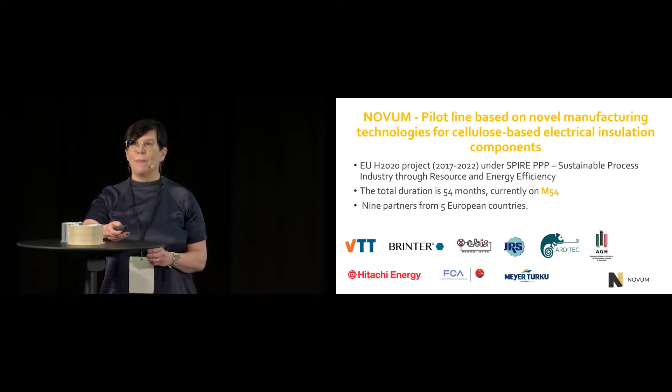Then we have JRS from Germany, and JRS is our material supplier, so they have been supplying us with the microcellulose that we used in our cellulose composites. Arditec from France is the partner who is providing us the life cycle assessment, life cycle calculation, very important things in this context.

AGH, it's a university from Poland, and they have been involved in testing of the electrical insulation components. And then we have the end-use partners. So we have Hitachi Energy involved in electrical insulation components, CRF, which is the Central Research Fiat, so that's the automotive partner. And then we have Meyer Turku, which is also local from here, Turku obviously, and they are involved in shipbuilding. So these are the end-use partners.

And where did it all start? So it started with an idea from ABB, which is currently Hitachi Energy. They had an idea that they wanted their electrical insulation component manufacturing to be more streamlined, more energy efficient, more automated, and so forth. And they had this brilliant idea that why not use 3D printing to do that? So they contacted VTT because we had some background in development of cellulose-based materials for additive manufacturing or 3D printing. And together we started to put together this project and contact the partners that we considered relevant for this purpose.

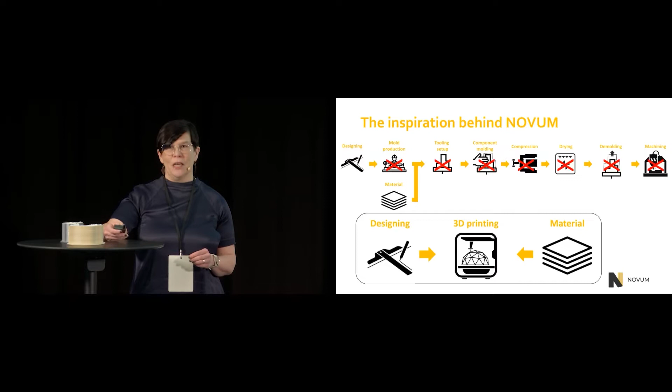And the inspiration was that this ABB's 11-step manufacturing method could be streamlined into just maybe 3 steps. But then after it's been 4.5 years, so things have changed. And now, as I said, Novum is so much more than just electrical insulation components. So we are today focusing on 3D printing of cellulose-based materials. There is cellulose-based composite, and then we are also looking into 3D printing of fiber foams.

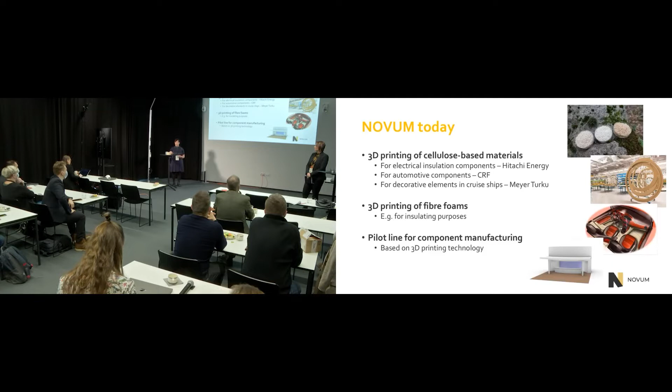And then we have the 3 different end-use cases. So we still have the electrical insulation components represented by Hitachi Energy, but we also look into automotive components represented by Central Research Fiat, and then we also look into decorative elements in cruise ships, which is represented by Meyer Turku. And as I said, 3D printing of fiber foams is also there, for example, for insulation purposes.

And then the real focus and the outcome needs to be this pilot line, so that it has been designed and built up, and that's based on 3D printing technology. So this is the focus of Novum today. And you will hear about these different components of the Novum project in the following presentation from the project partners.

We'll move on to the next presentation. I ask Tomi Kalpio from Brinter to come to the stage, and he will tell about the pilot line totally, and also showing you this is the grand premiere for the Novum pilot line video. So Tomi will show you also that one. So welcome, Tomi.

Thank you. Can you hear me loud and clear? Welcome all of you from my behalf as well. It's finally nice to meet you face to face after a while. Last time I was in this big audience in Formnext last November, so it's nice to be here again.

Today I'm telling you quite shortly, around 10 minutes, a little bit about the history of this pilot line, how the development has gone, and some ideas about the future. So hoping that we can get some discussions ongoing about the future of hybrid manufacturing, to be more specific. So, like said, I would like to have some good discussions after this presentation next to the pilot line or in the lunch. We don't have much time for questions right after my presentation, but later on we will have a lot. Some showcasing of these future modular environments.

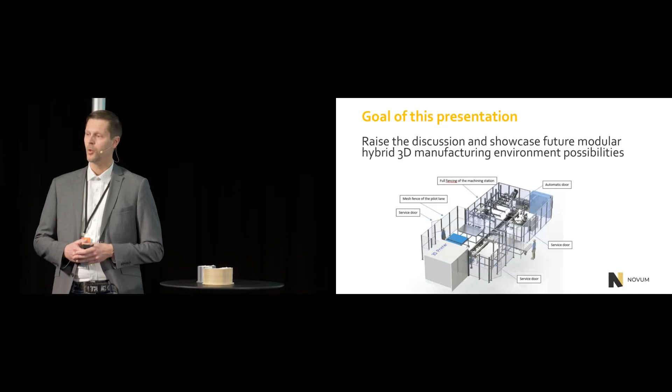So not only the printer itself is modular, but the environment where it will be used in production lines can be also modular. I see that this is more the future than these lines that are meant for only one purpose at a time. This is divided into two parts. So first regarding the printer itself and the modularity. How it all began. Heli already told you a little bit about how these projects have been evolving during these 4.5 years. So at some point we have had some changes in the focus areas. So that's why the focus of this development part has also changed a little bit.

So in the left side you can see where we started with a small desktop unit. We started printing some base types of cellulose materials to make some pre-analyses. And in the next phase, we developed this small-scale granulate printing system, which was already usable in the production lines as well. Like you can see in the middle top picture, there's a conveyor on the bottom side of this desktop unit.

You can move here. I was asked you to stand here so you can see me. Online people can see you as well. Okay. Sorry.

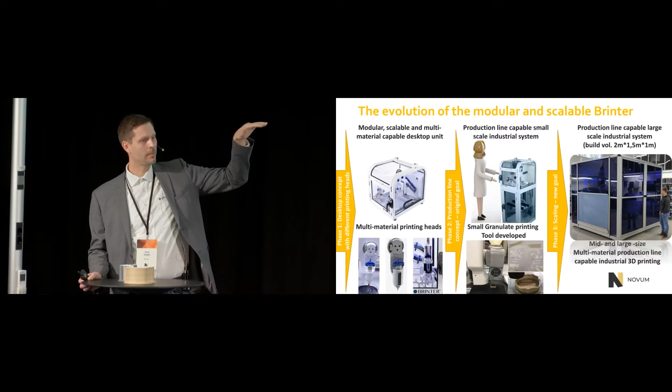But like I said, there's a conveyor unit on the bottom side of this desktop unit. So you can move the pallet in, lift it up, print on top of that, and take it out automatically. But this was still on the small scale system.

But in this phase, we got a small change to the project. Like you can see, the plan was to scale the concept a little bit bigger. Like you can see on the right side, the end product that you will see soon in a couple of hours in the pilot line, it's a little bit bigger than in the middle scene.

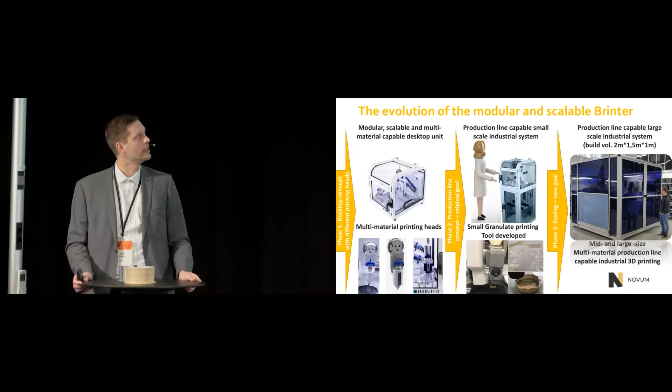So in this middle picture, it was like 300 millimeters times 200 millimeters times maximum 500 millimeters if you use this lift system on the bottom of this desktop unit. So now it's 2 meters times 1.5 meters times 1 meter. That is the maximum build size of the machine. So it was quite a challenge for us. We decided to take it, and now we are quite happy about it.

So we have a very nice platform that can be used in R&D, and why not in some production systems as well, or production parts. And also it's very scalable to the different challenges in the future from the modularity point of view. So both of the machines are very, very modular from that point of view, that you can use whatever tools or printing heads with the machine you want.

Few keywords. We can use our own developed printing heads, tools, component placement units, quality control systems, and so on, but also integrate third-party printing heads or tools in the same machine in the future based on the end product needs. So it brings us some possibilities to find new kinds of use cases, including multi-material. And this is one good example that I will come to a little bit later on.

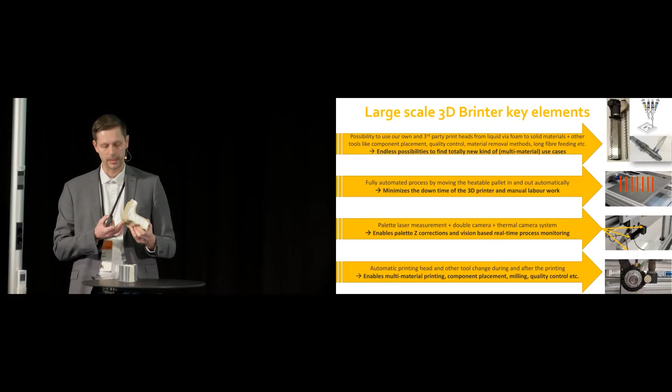So combining, for example, this cellulose-based material as a solid part and then filling it up with the foam, for example. These are very interesting cases for the future as well, using different kinds of materials in both cases.

The process is fully automated. Most of the 3D printing systems are something like that: you open the door and take the parts out, and then you put the new printing plate in and again start the printing. But in this system, it's fully automated. So again, the pallet comes in automatically. When the print job is done, it takes it out automatically. So it minimizes the downtime of the printer and manual labor work as well.

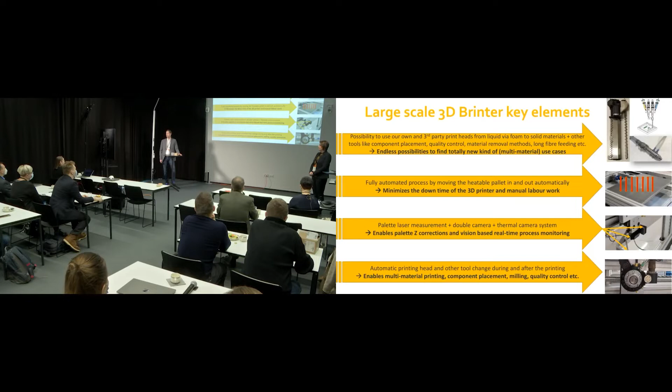Different kinds of analysis, laser measurement systems calibrating the printing bed, a couple of cameras to follow up the process, and also a thermal camera, which was quite recently integrated to the system, which helps our future development both on the process side but also the material development side, so we can see that the flows and everything are correct and the temperatures are where we need.

And again, on the bottom side, you can see this automatic interface that enables us to use whatever printing heads or tools with the, so to speak, printer. Couple of keywords. The printer's name comes from biomaterials and bioinks plus 3D printing. If you didn't know that, now you know.

Sustainable manufacturing. In this case, in the NOVUM project, it means that we have been using biomaterials and recycled the same material locally multiple times and made some tests as well, and it seems to work quite well. And of course, the possibility to use industrial grade standard materials with the same machine, also recycled versions. And multi-material is one of the key aspects, like shown here.

So we can have up to 4 different materials or even some component placement systems, so we can also implement some sensors inside of the printed parts, which could be quite interesting as well. Like mentioned on the bottom side, you can see these few development ideas, where component placement and this multi-material thing is one of the key aspects and main focuses, at least for us, including the foam.

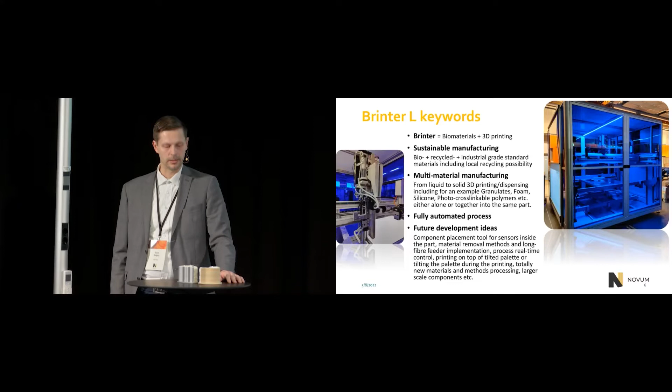And the second part is related to the pilot line and modular hybrid manufacturing environment.

There's a lot of text. I'm not going through all of these. You will get the slides later on. I just wrote down all the main aspects or topics that are interesting, at least from our point of view. But the main thing is that the whole production line should be modular and not only the

3D printer itself. We can then have multiple 3D printers feeding the same post-processing line, which could be very important with bigger parts when the printer itself is the bottleneck of the production. So if it takes multiple hours to print some parts, the other part of the production line just waits for the parts. So then we can have multiple printers to print the parts to speed that part up.

But also hybrid manufacturing environments, so that we could have injection molding machines and 3D printers in the same production lines, so that both manufacturing machines feed the same post-processing line, even in the different phases of the product life cycle. For example, in the ramp-up or prototype phase, we could print the parts and mass produce them with injection molding machines, and later on, after the mass production phase is gone and we have, so to

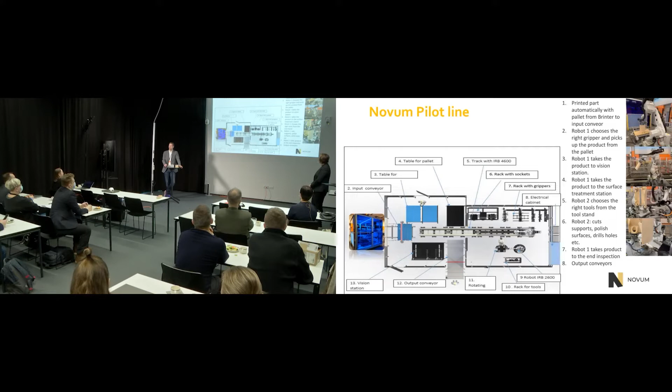But it starts from the left with the printer, where the part is printed, then it moves with the pallet to the input conveyor, and then the robot takes it from the pallet and takes it to the vision station and post-processing line for further processing. And there could be multiple different kinds of processes like drilling the holes or polishing or all kinds of different methods based on the needs.

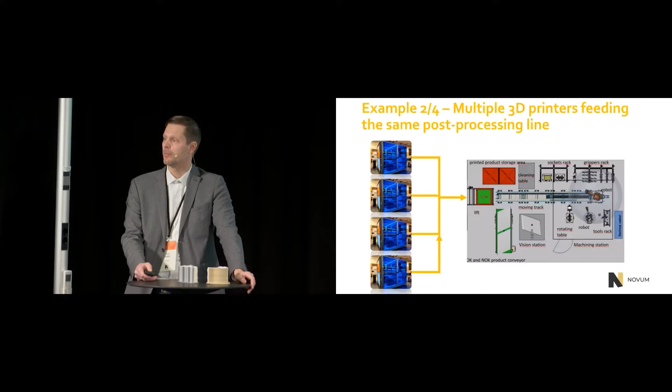Here I added 4 different case examples that I talked about earlier about this modular system. So the same post-processing line could handle, for example, parts from a printer and an injection molding machine. There could also be multiple different 3D printers feeding the same post-processing line.

Or this case that I mentioned, that injection molded parts will be moved to the printer and, for example, some sensors placed on top of that and some other material printed on top of that or something like that. So just to raise some ideas that you can take home and think through later on if you get some good end application ideas.

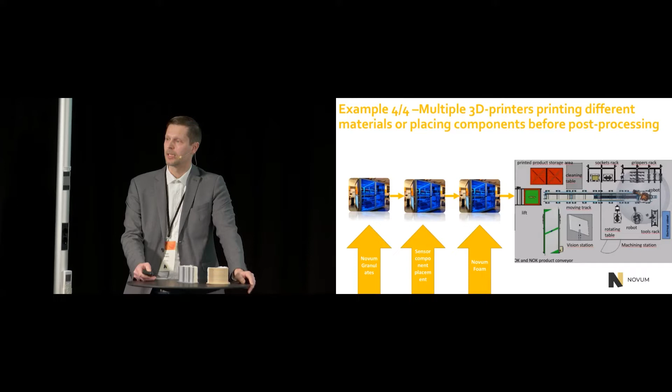And this is a little bit similar case that I mentioned. So first print granulates, for example, in the first machine. Then the next one places components and the third one prints foam. And all of these can be made with the same machine or machines which are next to each other as well to speed up the process if needed.

I don't say thank you yet. I ask if you could put the video on. Thank you.

In the fast-moving world of today, how can we replace the inefficient, labor-intensive and rigid processes of yesterday with new and better ones? We have the answer. The NOVUM project has created a one-of-a-kind pilot line that combines the benefits of versatile cellulose-based materials, flexible 3D printing and a fully automated post-processing line. This first-in-the-world pilot line enables rapid, design-driven production of intricate components for various end uses, such as components for electrical insulation or for the automotive and shipbuilding industries.

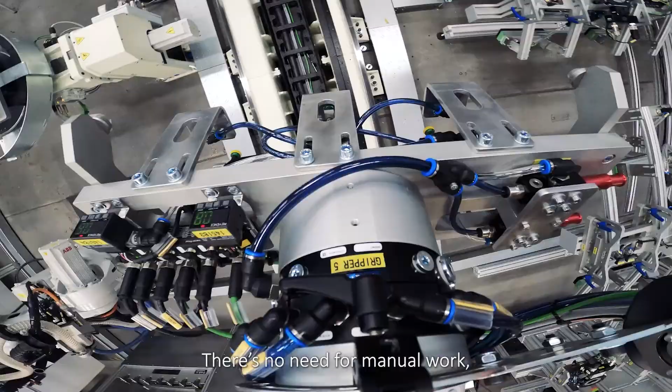The pilot line blends the various, at times complex, manufacturing processes into one seamless stage, and the resulting time and cost savings are significant. The fully automated pilot line is modular, flexible, and easy to scale up. There's no need for manual work, so the risk for human errors is reduced. Our cellulose-based components begin their journey through the 12-meter-long production line from the 3D printer.

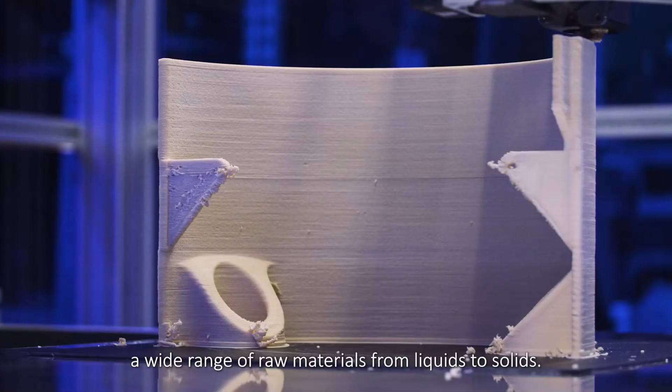The revolutionary industrial printer, manufactured by Brinter, is custom-designed and fully automated. Uniquely, the printer supports the future use of a wide range of raw materials, from liquids to solids. The process of exchanging the print head or other tools is fully automated. Materials, print quality, or even the composition can be changed or mixed mid-print.

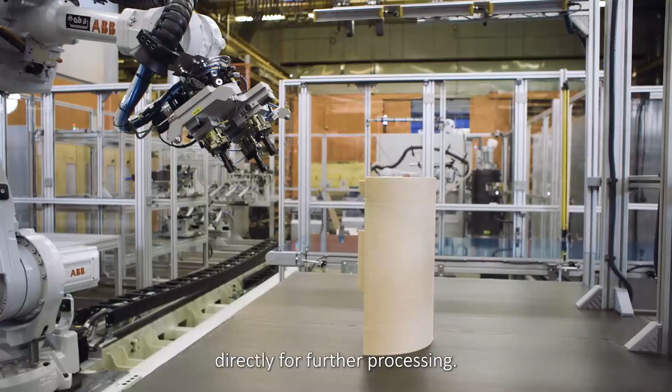When the printer's ready, a robot automatically fetches the component to the belt. On the belt, the component either passes through a vision station for quality control or moves directly for further processing. At the vision station, faulty components are removed from the belt. Flawless components are cleared to continue to the machining station.

The machining station is where the robots rule. They fetch and attach the needed parts to the modular production line independently. The tool-changing interface enables the attachment of basically any instrument. The robots are able to wield tools such as saws, drills or milling heads, or quality control instruments such as cameras or measuring devices. At the machining station, the components get their final form.

The station is protected by plexiglass so the robots can get on with their work undisturbed. This unique production line enables large-scale, flexible manufacturing. The integrated and fully automated post-production line saves time and money as the components can be finalized in the same process. Using the pilot line, we can manufacture anything from very small components to parts over 1.5 meters in length.

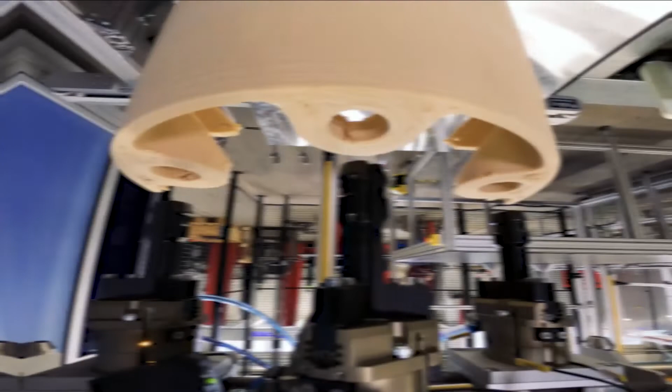The line is easy to scale up by adding more printers or post-production units to increase the production volume substantially. At the moment, we are manufacturing components for the transformer, automotive and shipbuilding industries. But thanks to the versatile nature of our raw materials and the flexibility of the 3D printing and post-production technologies, there are no limits to what we can do.

Wow, that was something. Thank you. Thanks. Yeah. I also saw, Tommy, the first time the latest version, so looks good.

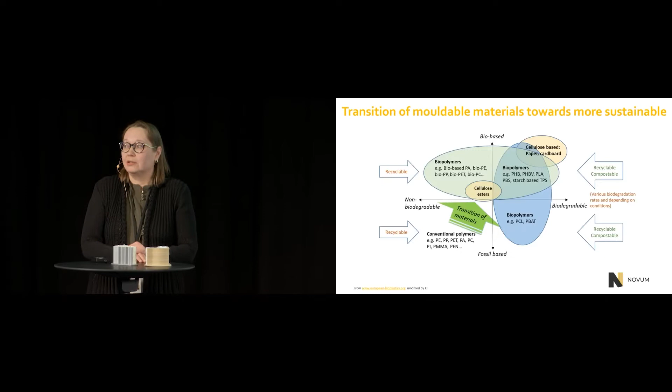First, I would like to show you a bigger picture of the soft materials. There is a kind of transition of these moldable materials from fossil-based materials to more bio-based materials. In the NOVUM scope, we work with cellulose esters and cellulose materials. Those are located, as you can see, in the world of materials.

And if we think of 3D printable materials for the future, there is a need for novel thermoplastic filaments and granulates useful for 3D printing, for example in home use. Then the material needs to be very safe, so no toxic fumes are allowed to be released during printing. Materials need to be bio-based and maybe contain some fibers to bring stiffness and possibly visual outlook for the product. And we need to consider also the product end of life.

So they need to be recyclable, maybe in some cases biodegradable, but anyway they need to have combustibility without fossil carbon dioxide. So maybe one perspective in the future will be all-cellulose composite materials.

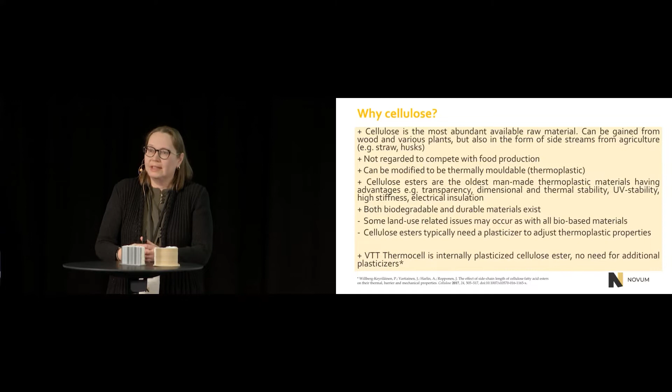Then why cellulose in this NOVUM project? Cellulose is the most abundant available raw material. It can be gained from wood, various plants, and also side streams from agriculture, for example. It is not regarded to compete with food production, and can be modified to be thermally moldable.

For example, cellulose esters are actually the oldest man-made thermoplastic materials, having advantages like transparency, dimensional and thermal stability, UV stability, high stiffness and electrical insulation. There are both biodegradable and very durable materials within these cellulose esters. There are some land use related issues, but those are connected with all bio-based materials.

Cellulose esters typically need a plasticizer to adjust the thermoplastic properties, which is a little bit of a drawback. But for that, VTT has developed a Thermocell material, which is an internally plasticized cellulose ester where the plasticizer is coupled to the cellulose backbone. So there is no need for additional plasticizer. You can read more about that in our publications.

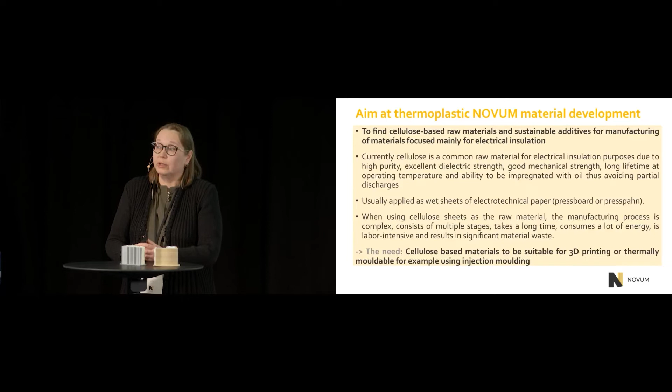And as Heli presented, there are several issues related to those processing methods: the manufacturing process is very complex, consisting of multiple stages, takes a long time, consumes a lot of energy, is very labor intensive and results in significant material waste. So there is a need for cellulose-based material suitable for 3D printing or thermal molding, for example using injection molding.

About the material development, this was already discussed a little bit, but within the NOVUM project, we made the material development in joint collaboration with material formulation, 3D printing, testing, and prototyping the final test product and testing them. So it was a collaborative, simultaneous loop of development.

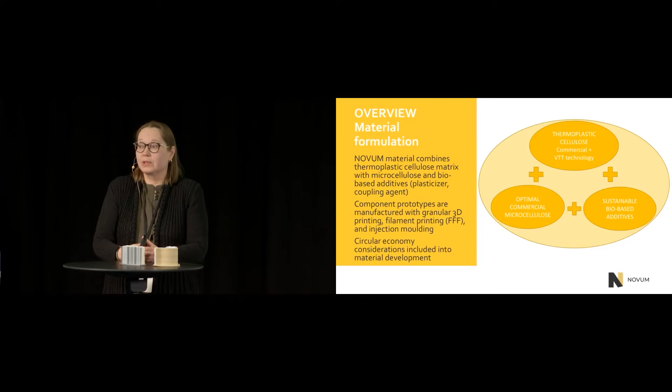Here is some overview of the material formulation. This new NOVUM material combines a thermoplastic cellulose matrix with microcellulose and bio-based additives like plasticizer and coupling agents. Prototypes are manufactured with granular printing, filament printing, and injection molding. And during the material formulation, circular economy considerations were also included.

Then recyclability of this material was also mentioned, which is a very, very important issue from the material tailoring point of view. We have studied the recyclability of these new materials and found out that it can actually withstand 5 recycling rounds without adding any virgin material.

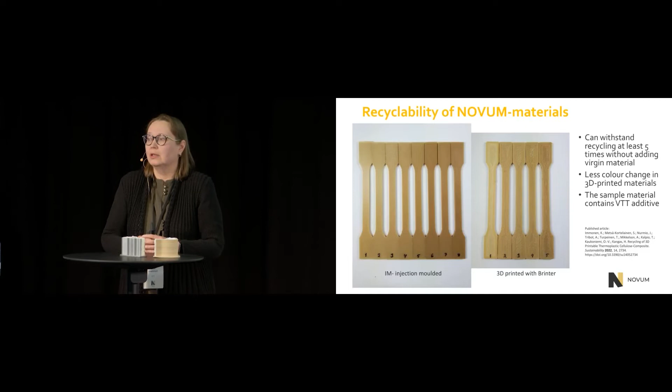You can see some injection molded samples and 3D printed samples here within the different recycling rounds. There is a little bit of color change, mainly coming from the microcellulose, but not too much perhaps. The color is quite light beige, but it is still usable after 5 recycling rounds. You can read more in our recently published article.

As a conclusion, we have developed within this NOVUM project a novel high cellulose content thermoplastic material and demonstrated it successfully in granular 3D printing, filament 3D printing, and injection molding. It has higher strength and thermal resistance than comparable commercial materials. The NOVUM compound is recyclable at least 5 times without adding virgin material. And when using this novel granular printing method, no additional filament manufacturing is needed between recycling rounds.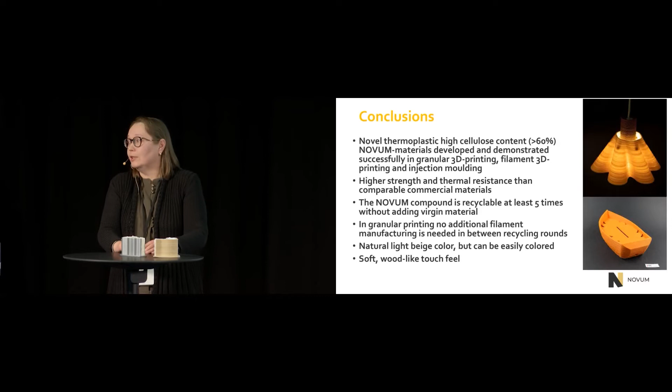It has a natural light beige color, but can be easily colored, as you can see here in this orange boat below. It has a soft wood-like touch, and in the upper picture you can see a lampshade where the light is nicely coming through the printed lines.

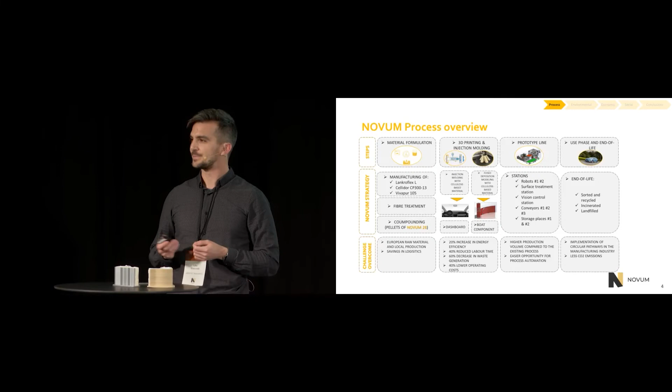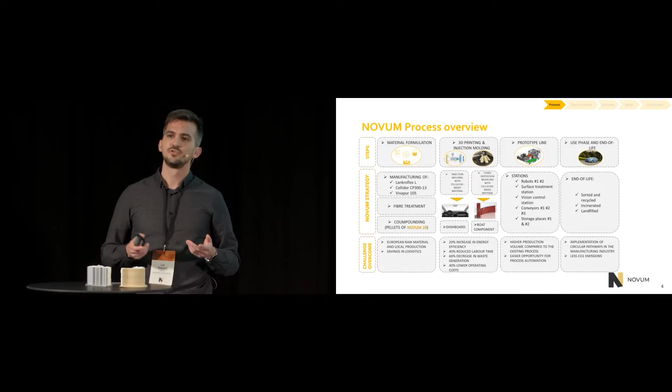Today I will present some of the results we got from the sustainable assessments. So first of all, this is the process we wanted to assess from an environmental, economic, and social point of view. So basically, we divided it in 4 main steps. First of all, we have the material formulation. Then we have the 3D printing and injection molding. Then the prototype line, and finally the use phase and the end of life.

So let's start with the environmental assessment. In this slide, as you can see, we try to first establish a comparison for the production of 1 kilogram of different materials, including NOVUM 28, of course, that you can see in yellow on the left. And for the comparison, we chose different materials, common materials widely used in the industry. So we have polypropylene, polyethylene, and acrylonitrile butadiene styrene, let's say ABS.

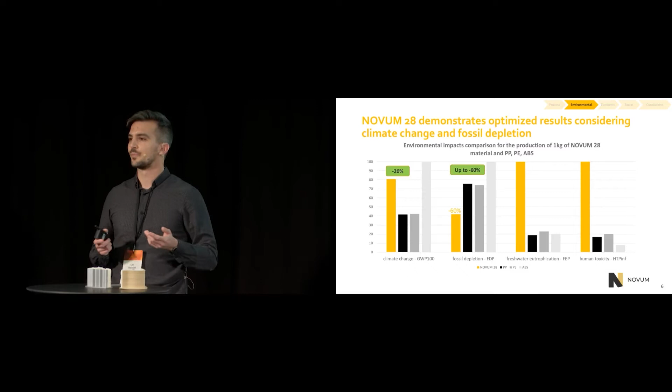And what we can say about this slide is that we observe optimized results considering fossil depletion and climate change. If we take, for example, the fossil depletion, we observe an impact reduction up to 60% between our material, NOVUM 28, and the ABS. So these are quite encouraging results.

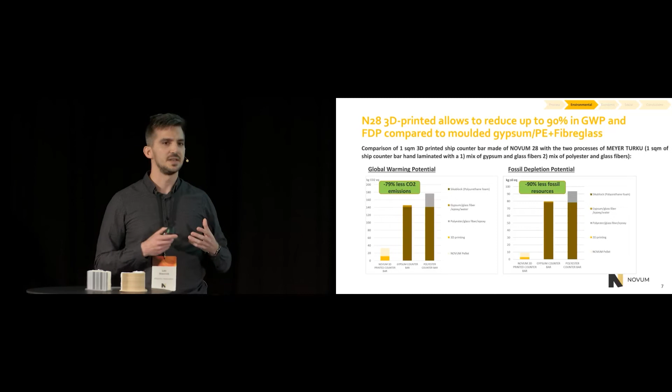Then we also compared the environmental impact for 3 processes to produce 1 square meter of the same end product, which was a ship counterbar, normally developed by Meyer Turku. So we have 3 processes on these 2 figures. So the first one on the left is our process, the NOVUM 28 material formulation plus the 3D printing of Brinter. And then the second and third processes are developed by Meyer Turku using hand lamination with 2 different mixes of material.

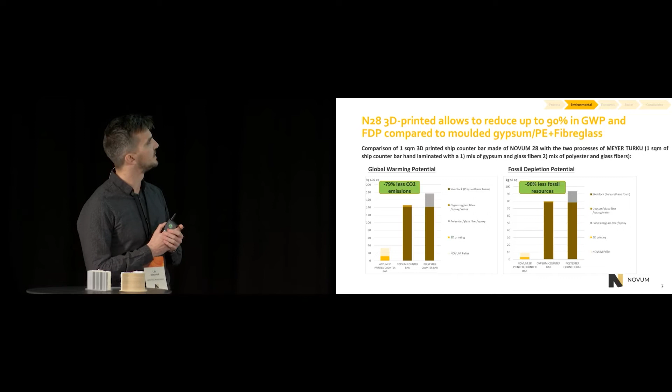So the first one in the middle is a mix of gypsum and glass fiber, and the second one is a mix of polyester and glass fiber. So they're both using hand lamination. And we can see that the figures speak for themselves. We have really good results concerning our process using 3D printing and cellulose-based material. We have a reduction of 79% in the CO2 emission and a reduction of 90% in fossil resources.

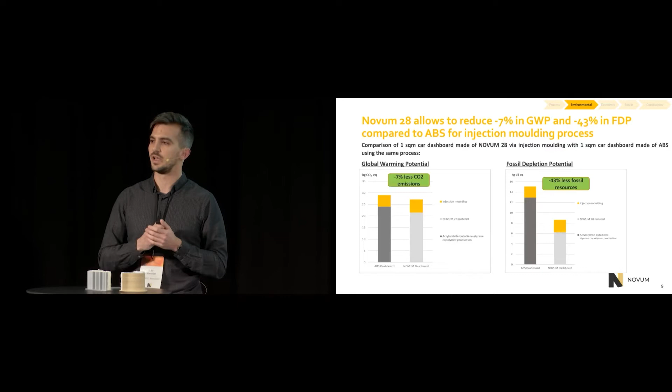And then we did exactly the same thing, but this time comparing a second end product, which is 1 square meter of a car dashboard. And this time we use injection molding for both processes, but using different materials. So we have the ABS material on the left and our material, Novum 28, on the right.

And these are quite good results as well. This is not as impressive as the previous scenario, but we can still observe a reduction of 7% in CO2 emission and a reduction of almost half of fossil resources for the same product and different materials.

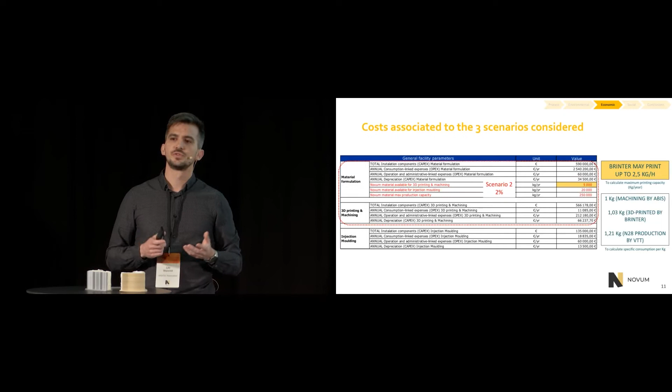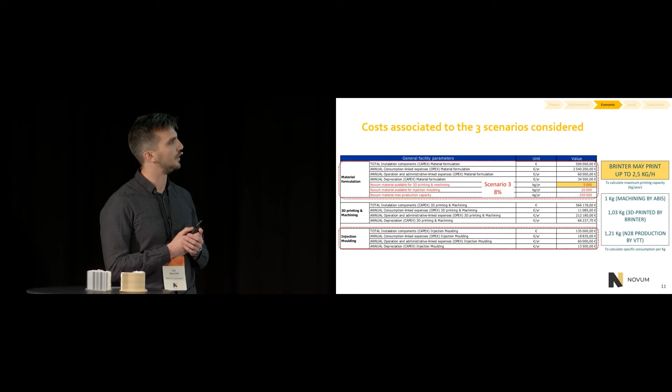We took 2% because VTT is able to produce 250 tons a year of Novum 28, when Brinter can print 5,000 kilograms a year. So it didn't make sense to allocate the whole production of VTT to Brinter. And in the third scenario, we applied the same logic with 8% of VTT's production capacity, considering the material formulation and another process, which is injection molding. So these are the 3 scenarios.

And then this is just a parenthesis concerning the CapEx and OpEx distribution of the second scenario, which is the material formulation and the 3D printing. So we can see that the OpEx accounts for 63%, the CapEx 23%, and the consumption OpEx 14%.

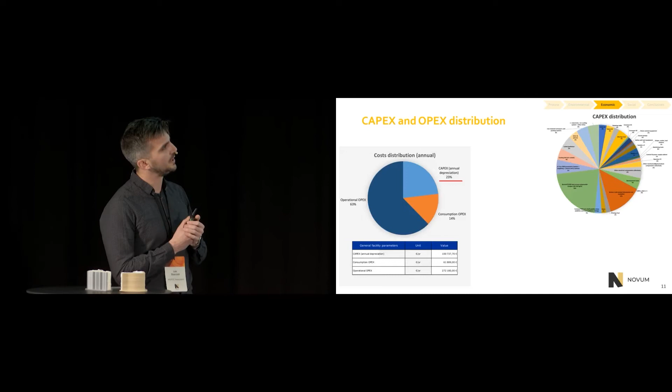Then if we go deeper in the CapEx distribution, we can see that the machinery of Brinter and ABIS are the main contributors, let's say. And for the OpEx, we can see that more than 3/4 are coming from the labor force of ABIS, Brinter, and VTT.

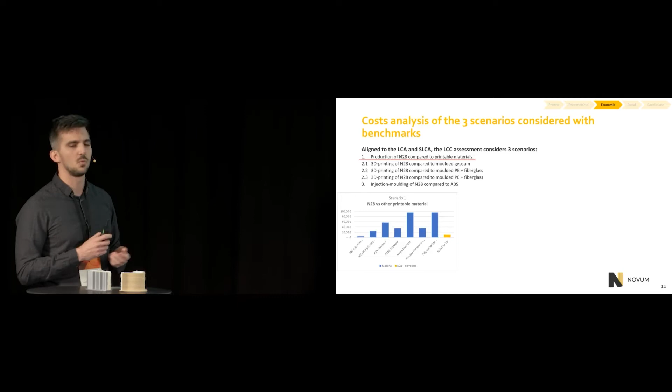So this was just a parenthesis. Now I go back to the different scenarios and their results. So for scenario number 1, considering only the printable material, we try to compare our material with the current printable materials on the market. And we can see that we have some really good results, with one of the cheapest printable materials on the market, around 10 euros. Then if we compare it with nylon filament, for example, it almost reaches 100 euros. So this is quite good.

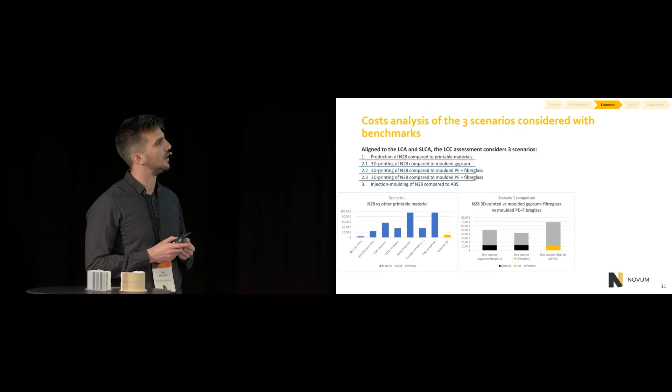Then for scenario number 2, we have the Novum 28 3D printed versus the molded gypsum fiberglass and molded polyethylene and fiberglass. So these are the 2 scenarios that I described previously, developed by Meyer Turku. So we can see that our process is quite good, reaching 70 euros for the ship counter.

Sorry, can I have a glass of water? I have a pretty dry throat. Thanks. Sorry about that.

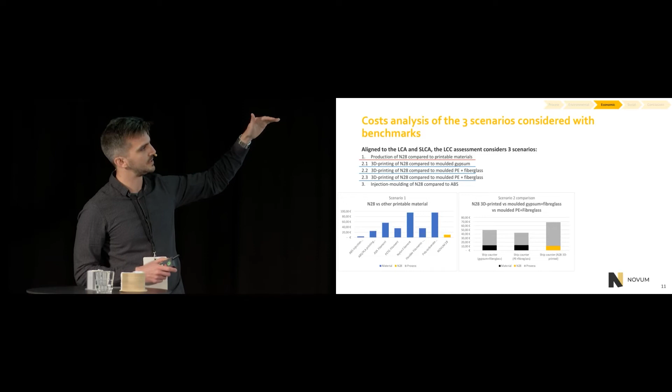So we can see that if we consider only the material, we are quite stable. We have almost the same price for the 3 materials. So considering the polyethylene and the fiberglass, the gypsum and the fiberglass, and our material, it's quite the same. But then if we consider the process itself, the 3D printing, it's a bit higher for us, which is normal because it's a prototype, so it needs to be further optimized.

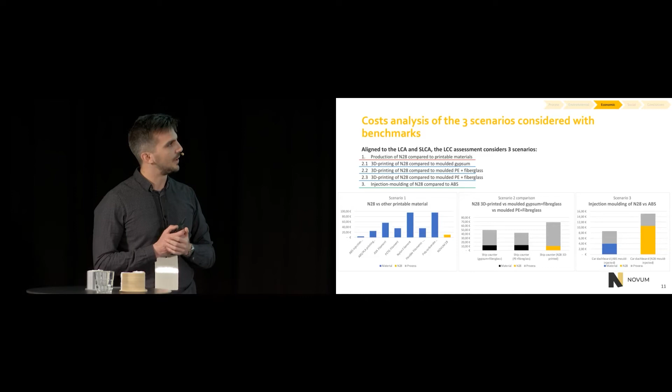And then we did the same for the injection molding of Novum 28 versus the ABS. So this time we have the ABS, which is quite cheaper. It's normal because it's a widely used material in the industry. And so our material is a bit more expensive, but the process is the same, which is injection molding.

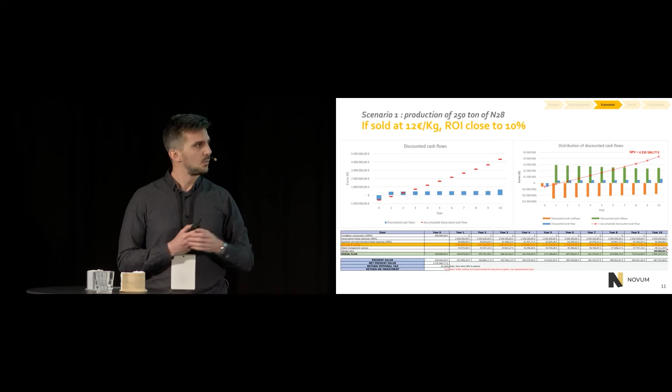So then we have a first scenario with a huge volume production of 250 tons of Novum 28. We try to forecast, we try to make a business model. So we have a material costing 10 euros, and if we sell it at 12 euros, we can reach a return on investment close to 10%, which is quite interesting.

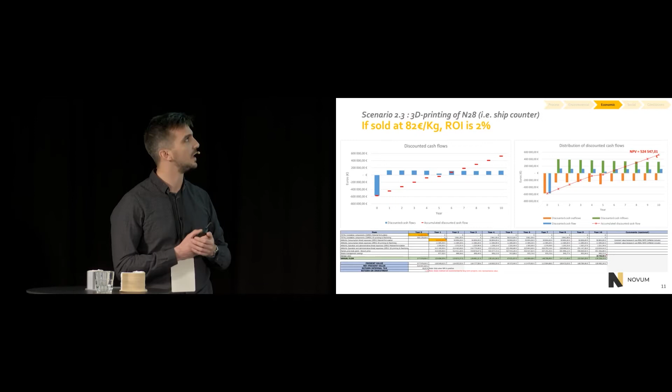Then for this second scenario, including 3D printing as the process, of course the price is higher. It costs us around 65 euros, and if we sell it at 82 euros a kilogram, we have a return on investment of 2%. I'm going quick, sorry, Alina.

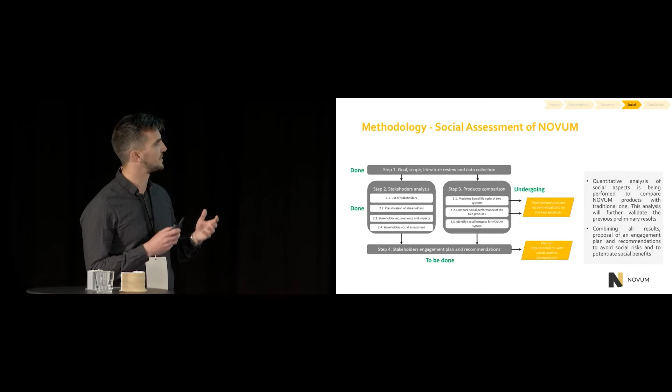So then we move to the social assessment quickly. This is the methodology we applied. We have step 1, the goal, scope, and definition. Then we proceed to stakeholder analysis, where we perform different interviews with the different partners, etc. And then we have a product comparison, and with all these steps together, we can produce a stakeholder engagement plan and provide some recommendations.

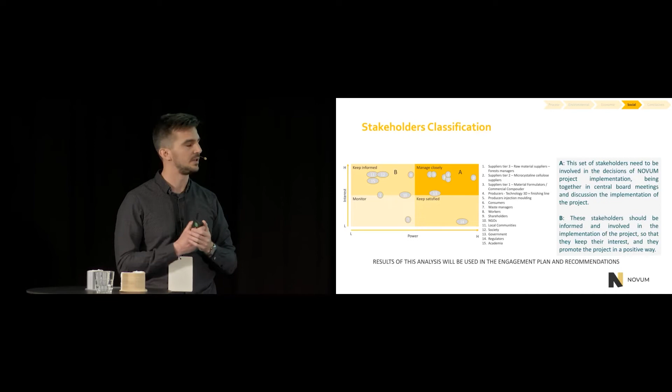Quickly, this is a tool we used in the stakeholder analysis. It is a power interest grid. So we try to classify the different stakeholders of our value chain as a function of their power and their interest. So in section A, you can see the stakeholders that we have to manage closely, that we need to keep informed, that need to stay involved in the implementation of the project. And in section B, these are the stakeholders that we need to just keep informed, let's say.

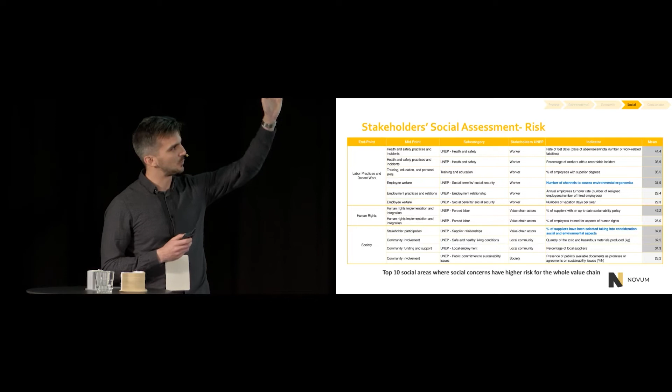And this is a quick table on the stakeholder social assessment risk, with the top 10 social areas where social concerns have higher risk for the whole value chain. So basically, we can see that we have very low risks, with the mean on the right, and this is good for the project. And we did the same thing for the opportunities. And we can see that we have some really nice opportunities, for example, in the employment area.

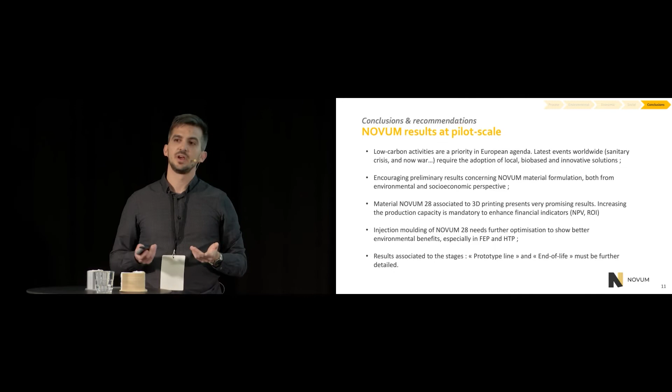Quickly, the conclusion and recommendation: we can see that we have some really encouraging results concerning the environmental and socio-economic perspective of our project. We have to keep in mind that this is still a prototype that will be further optimized, of course, in the coming years. And that's it, I think. Sorry, Alinda.

Thank you. So just one point I think is important to highlight. This is the production capacity that we need to increase if we want to have better results concerning the economic assessments. And yes, thank you.

Sorry if I... Thank you, Leo. Thank you for the presentation. Sorry for pushing the time. No, it's okay. It's okay. Thank you. Thank you, Leo. Thank you.

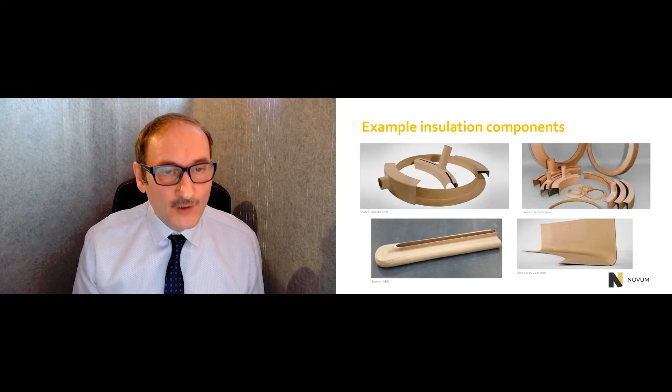We have a lot of possible geometries, with sizes varying from a few centimeters up to even meters. On the next slide, you can see some examples of transformer insulation; some of the shapes are very simple, but we also have complex shapes. This is why we thought additive manufacturing could be a good opportunity for these applications. It was already mentioned in a few previous presentations why we wanted to think about a new material, still cellulose-based, because such materials are mostly used in transformer insulation applications.

The current manufacturing process consists of a number of stages, these stages are labor intensive, and a number of operations are required to produce the final insulation components. Usually we use wet cellulose pulp and dedicated molds, and we sculpt the final shape on the mold. This is many hours of manual operations to sculpt these thin shapes on such molds. After deposition on the mold, we have to use an additional clamping system to remove the moisture from the wet pulp. After that, we have another very long-lasting and energy-consuming process: we have to put the component in the drying oven, and usually you need 5, even up to 8 hours to evacuate the moisture. So altogether, adding all these stages, we have a long cycle time and a lot of energy consumed.

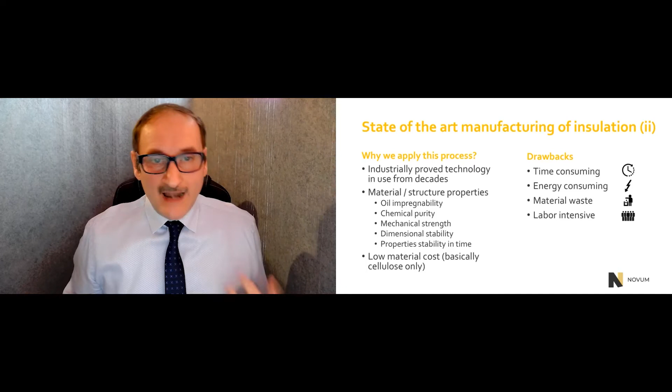So we have a number of drawbacks, but still this is the dominant technology because it's well proven and well known in our industry. But of course, we had an idea how to change this complex process and how to eliminate some of the operations, for instance, the manufacturing and design of the dedicated mold, and also remove these energy-consuming drying operations. And our idea was to use 3D printing.

Also, we were considering in the initial phase of the project thermoforming. And as it was mentioned by Heli, we had this idea some years ago, and we contacted VTT, and the project was created aiming at development of new material formulations, still cellulose based, and also new manufacturing technology. During the project execution, dozens of materials have been developed by VTT. I think it was close to 50 different material formulations.

And of course, our key task together with our colleagues from the Insulation Kit Center, but also with the university partners of the University of Science and Technology here in Krakow, was to really test these materials. We had quite long and extensive testing procedures for selection of the best materials. The first key parameter we call oil compatibility. We must be sure that the material immersed in transformer oil under elevated temperature doesn't degrade, so we don't have any mechanical issues, cracking and so on, and we don't have any chemical interactions between this new material and the transformer oil.

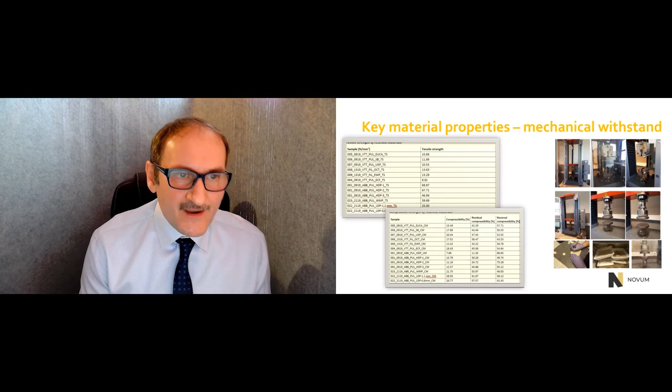Also, a lot of mechanical parameters have been measured, mainly tensile strength and compression strength, and a number of dielectric parameters like volume resistivity, dissipation factor and permittivity, breakdown strength, and also the possibility of creation of partial discharges. All these advanced measurements have been done by our university partner. After testing so many material formulations, we approached the stage where we are almost fulfilling all requirements related to the application of such materials in transformer insulation.

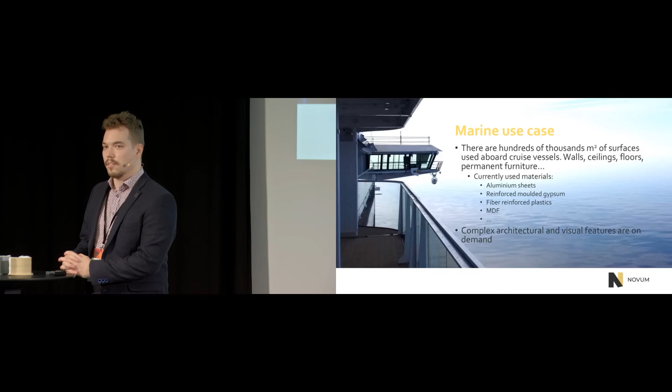But our core business is the hull, the design. We subcontract these areas, this furniture, these panels, and therefore it is extremely important for us to develop these use cases together with the marine cluster and with our subcontractors, so that we can respond to the need of more sustainable materials and new demands of complex architectural and visual features, and the materials that are used that tell the story. This is also important to our customers.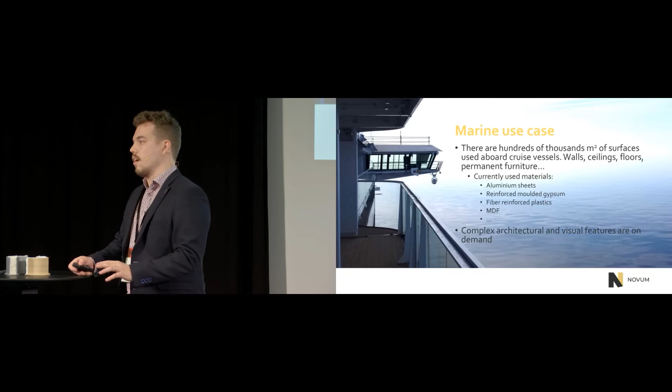Most of these panels are not really suitable for 3D printing. They are flat and they are easy to produce traditionally. But there are some that are very, very labor intensive or costly to, for example, CNC out of. Here are some example pictures of the interiors to give you some perspective. There are tens of bars and restaurants inside this ship, and these are just the tip of the iceberg.

There can be much larger use cases, scaling up to 10 meters or more than 10 meters, where you can actually start to maybe think about some weight reduction benefits. But of course, we are not trying to make a lightweight ship out of 3D printing. It's not there yet, and probably never will be.

But in Novum, we examine these panels and their benefits if we do it with 3D printing with these thermoplastic composites, and as Leo mentioned, found out some cost effectiveness in unique structures and these very small batches. And also with the pilot line, we can make use of these built-in interfaces and post-processing methods to make these first 3D printed samples much more representative of the end use samples. So maybe some coating or something like that needed afterwards, but then it's all good.

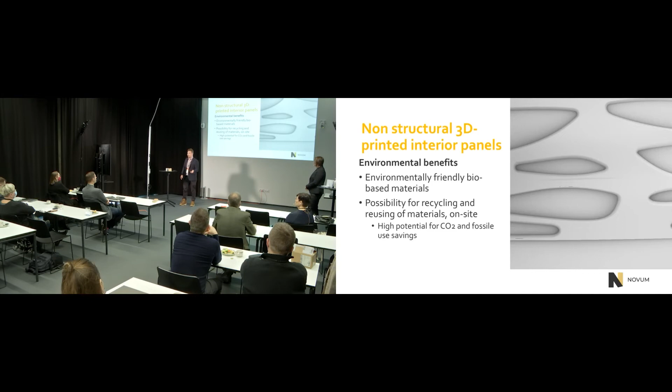I'll only gloss over the environmental benefits. It's a multifaceted subject. The molds, as Leo explained, might be very environmentally unfriendly. I'm not saying they are environmentally unfriendly, but they can produce much emissions. So if the molds are used only 1 or 2 times, then there's a real benefit to be had here. And of course, the material, as Kinga also mentioned, is recyclable. So basically chuck it in the recycling grinder and start extruding again. So there are potentials in there.

So about the marine concepts in Novum, we prepared these proof of concept demonstration pieces of this bar, facade, and pillar, which utilize also the building capabilities of the pilot line to move them around and to post-process them. Because there are post-processing methods for smaller 3D printed parts on the market right now. But for these larger parts, it is quite difficult. You're basically left with the option of chuck it in a large CNC or elbow grease.

So for the 3D printing, we of course want to reduce the machine time and build as fast as possible, but that leads to a reduction in resolution and the details, and also the surface roughness. Well, in some cases it might be acceptable, in some cases it might not be. So in the pilot line, if we are printing a finger-sized bead of the extrusion material, then we can't have millimeter details. So this is where the pilot line comes in.

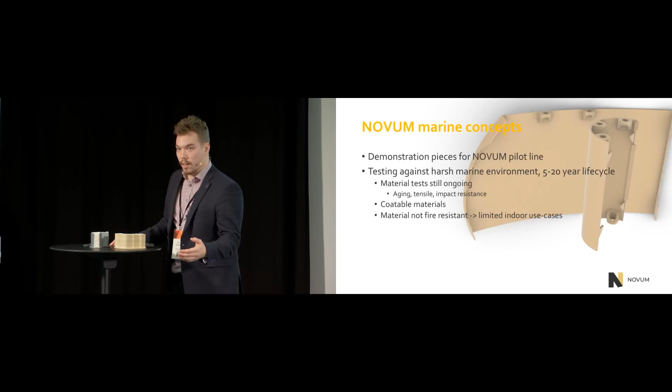But this is only the geometrical side of the coin. Then we also have the longevity. So if these panels cannot last their full life cycle, the environmental and cost benefits are lost. And therefore, in Novum, we have been conducting material tests to see how they age and how they fare in these harsh marine environments. Because if you work in the marine industry, you probably know this without me telling you, but there are very strict fire regulations inside these ships.

And these materials, these cellulose-based materials, currently are not fire resistant, and therefore they have limited indoor use cases. So they are much more subject to the outside environment. And this is still ongoing, and I hope some good results will arise from those tests also.

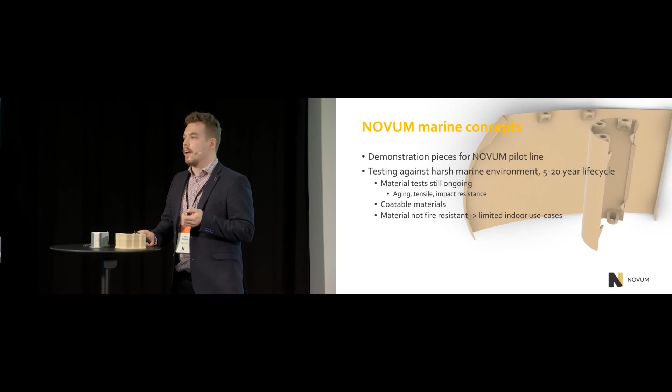And now, we are not alone in this development. I'm glad that there is huge interest in the marine industry in additive manufacturing. The concrete cases are starting to pop up, and I'm very glad of it. And also in panel manufacturing spaces.

Lastly, about the future, I invite you all to consider this project in the context of the shipyard's sustainability strategy. We are committed to having buildable carbon neutral cruise ship concepts by 2025, and we want to be carbon neutral as a shipyard by 2030. And it includes a lot of different things that need to be taken care of and need to be developed, but these new materials are one of them.

Even though the bulk of shipbuilding emissions come from the steel structures, these materials are still needed, and we will continue the development of these additive manufacturing cases even further. And we also want to encourage and hopefully inspire everyone in the marine cluster and our subcontractors to experiment and see where these new technologies might lead us as a whole. Maybe we will get some innovations that reshape the marine industry, but for now, I guess small steps need to be taken to start a great journey.

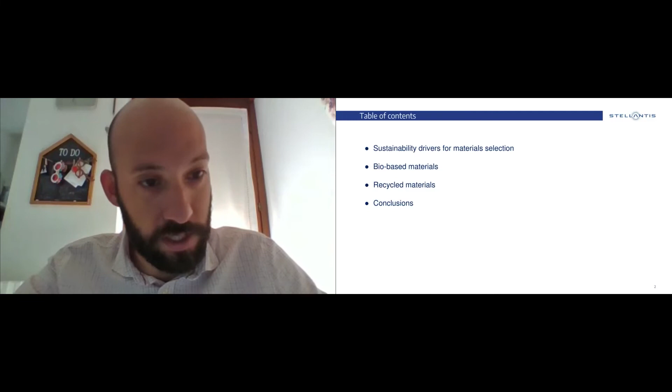So during the presentation, I will go through these main topics. What are the sustainability drivers for the material selection? What are the bio-based materials, the recycled materials, and the conclusions. So the sustainability drivers for material selection. Automotive sustainability passes through development of new car concepts, architecture, and systems, but also through the adoption of new materials, leading to a beneficial environmental impact.

So, in order to have a green content, it's mandatory to couple the material selection criteria with the final requested performance. In other words, if you want green materials, you also have to keep in mind the final properties that the components need. These are the two main strategies to increase the green material content in the auto. I'm talking always about plastics. So use biopolymers and biofillers and increase the use of recycled materials.

So what are bio-based materials in automotive? In automotive, there are two different bio-based materials, the biocomposites and biopolymers. Biocomposites are materials in which the reinforcement is natural fibers like hemp, kenaf, flax, and so on. And the matrix could be from either fossil or renewable resources. Biopolymers are materials that derive from renewable resources, usually from food scraps. Use of this type of material leads to a reduction of the carbon footprint. So we have a saving of fossil resources and also a potential weight and cost reduction.

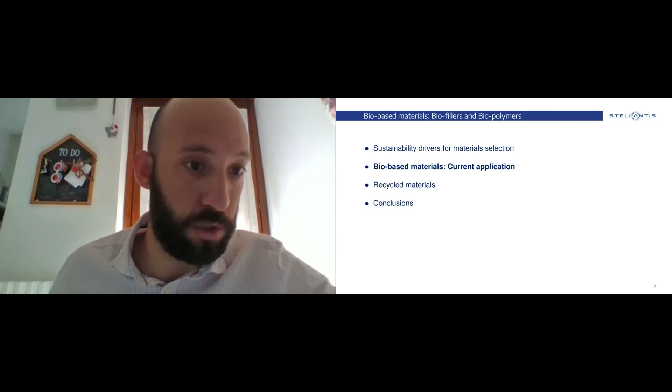I will show you some current applications of bio-based, biocomposite materials. So this is an example. It's a current application on the Alfa Romeo Giulia. This is the dashboard carrier. It's a biocomposite structural application in which we have a polypropylene reinforced with hemp fibers. And this solution also led to a weight saving compared to the standard application, which is with glass fiber or talc, which have higher density than the hemp fibers.

In this other chart, I report an aesthetic application. This is the fascia of the Fiat Panda. It's a 2K injection in which the aesthetic layer is made of polypropylene with wood fibers. In this case, the wood fibers are aesthetic.

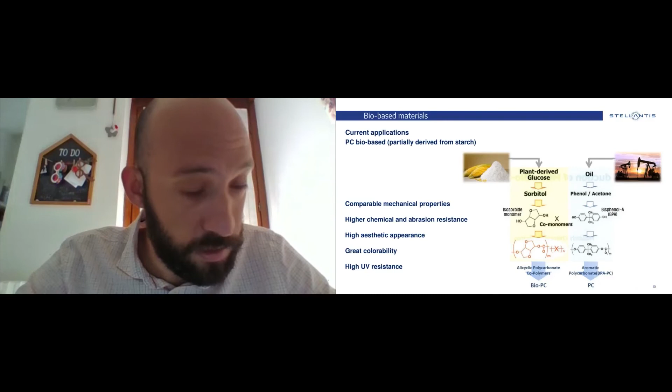The other way to use bio-based material is the biopolymers materials. In this case, I show you an example. We have a polycarbonate bio-based, which is partially derived from starch. This material has comparable mechanical properties to the virgin one, but shows higher chemical and really high abrasion resistance, with high aesthetic appearance, great colorability, and high UV resistance.

And for this reason, we have been able to apply it in several interior applications, such as these lenses of the climate control of Fiat Tipo, Fiat Ducato. We use it also for the key cover of the new 500 electric, and also for a small trim around the 500L radio, this ring. It's a piano black effect.

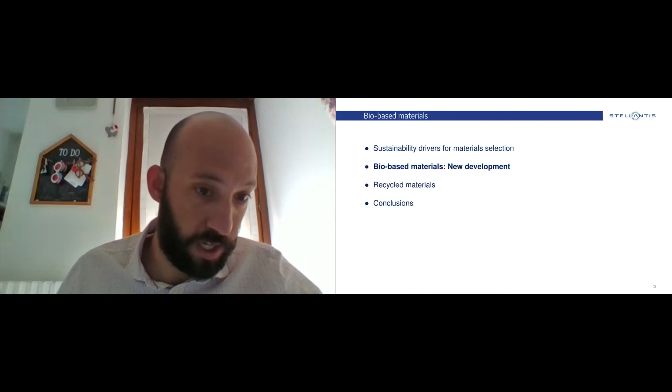New development. Now I'm talking about the NOVUM project. So we arrived in the NOVUM project in the last year. So it was already developed, and we evaluated two of the many compounds that the consortium produced during the 2 years before. We chose the 32 and 33 compounds, and we started the evaluation on the injection molding technologies.

Then, of course, we are also interested in the additive manufacturing technologies, because for spare parts additive manufacturing can sometimes be a winning point, and also it can lead to lower cost during the development phases, and can be also feasible when you have a low or medium volume part production.

So for this reason, the next steps will be to evaluate the properties of the fascia of the 500 dashboard, which is a really customized color component that we have in the interior of this car. And so coupling the additive manufacturing technology with the green material content can be a really good winning point to have a really highly customized application.

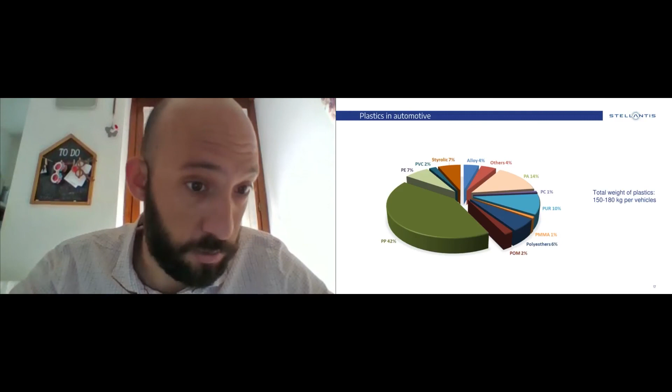So in the graph here, I report more or less the plastic share in the automotive, where, up to 150-180 kilograms of plastics per vehicle, we have more or less 50% covered by polyolefins, like polypropylene and polyethylene. And then with polyamide and the styrenic alloys, so polycarbonate and polycarbonate ABS, we are around 90% of the total thermoplastic share in the car.

So for these reasons, in the last 1-2 years, we homologated different thermoplastic recycled materials, polypropylene, polyamide, and PC-ABS, because with these 3 classes, we can cover more or less 90% share of the thermoplastics.

And of course, to increase the use of recycled plastic share in the future cars, there is also a need of stable performances of the materials, the new material specification that now I show you, and also new specific design, because with the recycled materials, you have different mechanical properties, and so you have to apply these different mechanical properties on the final component.

Luca, can you hear me? Yes. The time is running a little bit, so... It's basically finished.

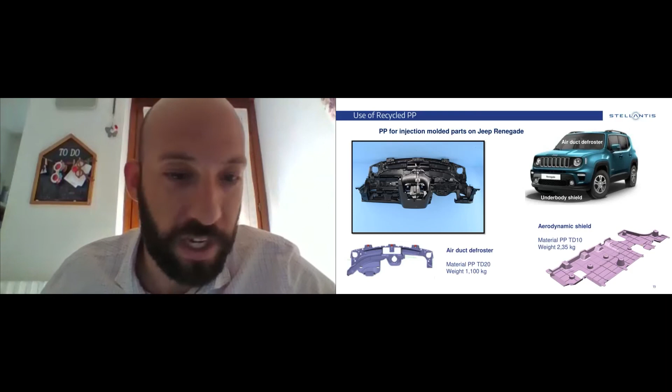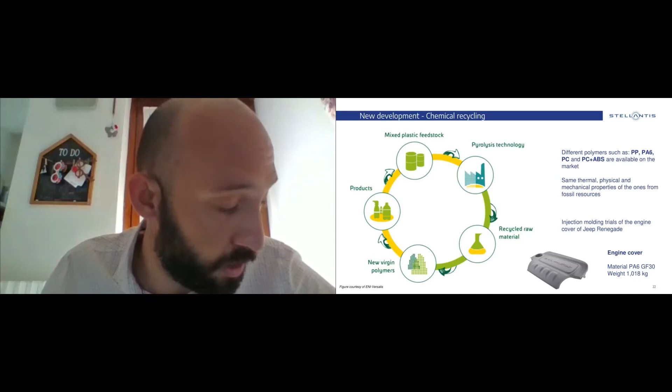And the new development will be the chemical recycling. When the mechanical recycling is not possible, the chemical recycling can be a winning point, because you have the same physical and mechanical properties as the virgin one.

So in conclusion, the major drivers for recycling development are regulation for homologation and new EU strategies for plastics in a circular economy. Green materials are already present in vehicles, and several innovation projects are running to improve our product sustainability, like NOVUM. Next generation models will introduce more innovative materials, and to have an innovation output, you need a reliable application. And collaborative research and innovation activities are crucial to speed up the readiness of sustainable materials, strengthening the value chain.

So thank you all, and sorry if I go longer. No, this is just, it's like I speed up a bit. No problem. It's like an avalanche once we're a little bit late, and so you were unfortunately the last online as a presenter.

So, thank you, Luca, for the presentation. It sounds very interesting. It's a radical change you're facing with the material use in the car industry, material-wise but also production-wise. So thank you for sharing your insights, and I see that for you also there's going to be a continuation in the path, obviously. Yes. Thank you, Luca.